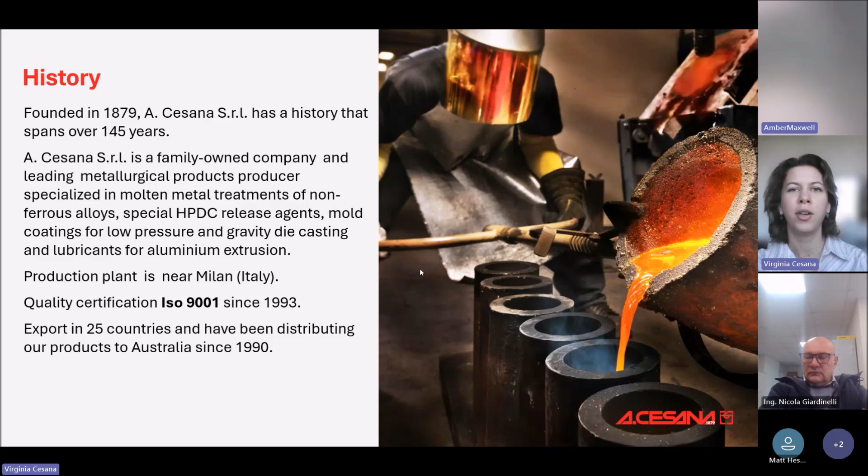So we have extensive knowledge of the industry thanks to these 146 years of existence. And my father has 38 years of experience in the foundry industry. He's seen all sorts of situations and issues, and always tried to resolve them. That's our goal. Our mission as a company is to resolve foundry issues. We usually come in person, we see the problem and we resolve it.

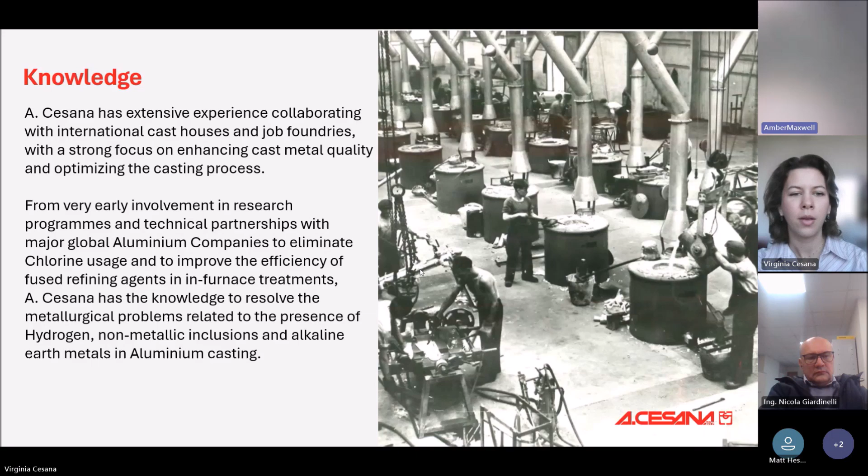And then we have a small engineering department in our company which concentrates on the scientific approach to solve these issues. For this reason, we manufacture machinery and new technologies, which are also automated. Now we have the possibility to connect these machines with remote access to your phone, for example, so that you can always download data or call maintenance or assistance if it's needed.

So yeah, we are very keen on quality, on improving quality and improving processes, making them cost effective and optimizing them. There you go. I was struggling to find the word.

And now I'd like to pass the word to Nicola, who will take you through the presentation of what fluxes are and why they are important. I'll keep on moving the slides. Nicola, if you need to change them, let me know or give me a sign.

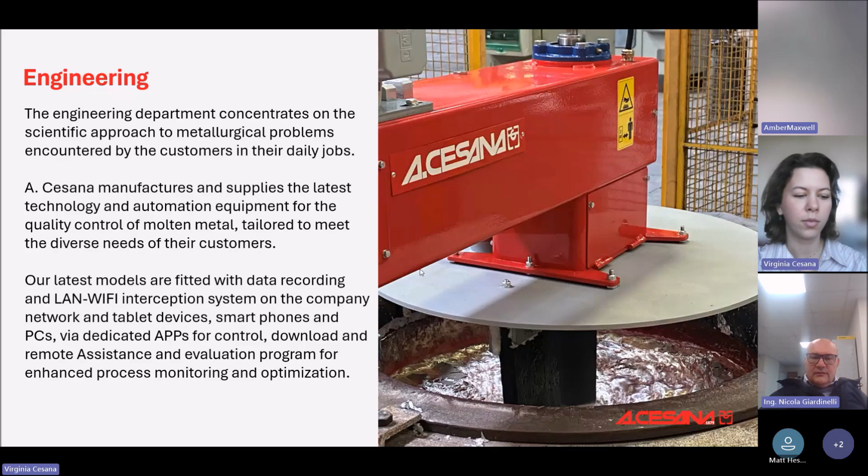Yes, please. So, hello everyone. I am Nicola. I have been with Cesana for 8 years, and I am the commercial manager and technical assistance manager. We work very hard to help the foundries and our customers resolve all problems in the foundry, metallurgical and technical problems, with our products and our knowledge.

So our history is clear, and we produce inside our company all the materials that we supply to customers and distributors. Our focus is flux. And what is flux? Flux is a blend of solid inorganic compounds such as sodium, potassium, chloride, carbonate and fluoride.

The flux is normally used during melting to clean the aluminum and the material. The flux reacts at high temperature to generate an exothermic reaction, able to separate the impurities from the aluminum.

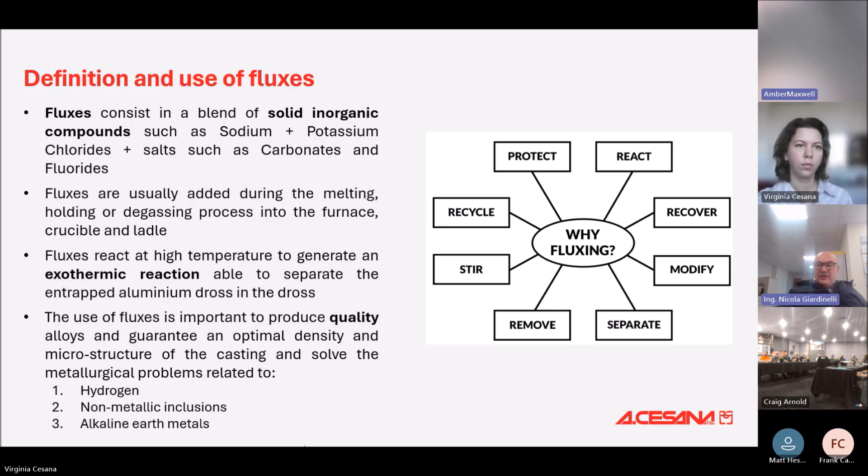Why use flux? It's important to use it to improve the quality of the alloys in terms of hydrogen, non-metallic inclusions and alkaline earth metals. Please, Virginia, change. Okay.

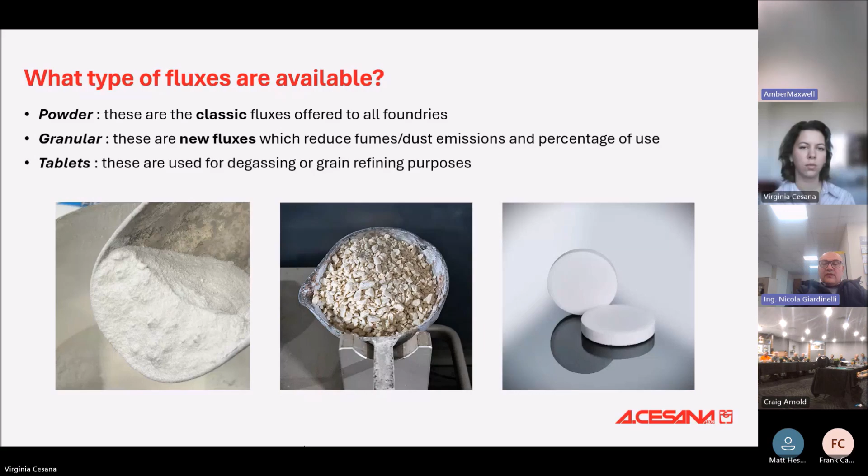Which fluxes are available on the market in the foundry now? Powder. Powder is the classic form of flux; it's very old technology, but still in use in some foundries. The new tendency is granular flux, which was developed to reduce fumes, dust, and emissions. And also tablets, special forms used for degassing or grain refining processes.

So the flux is normally used in powder form. The powder flux is used in high quantity during the process, and for that the powder is not common now, because using granular flux we can save the quantity of the product used during the process.

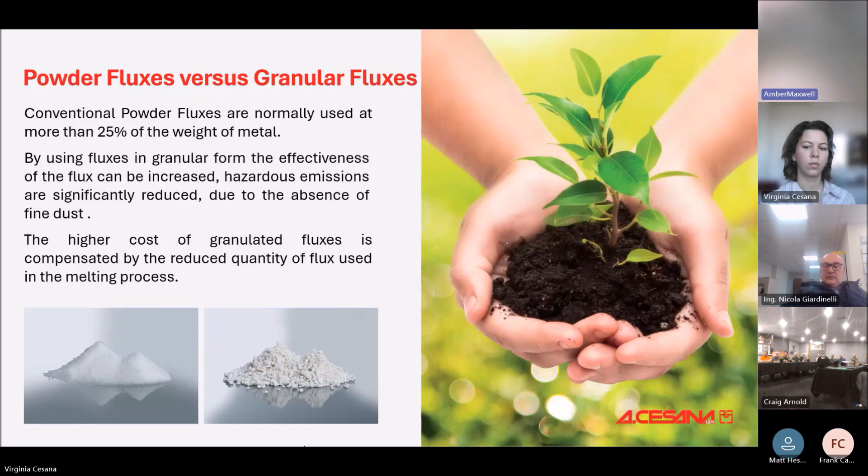So we have different types of flux used for different effects during the process. The first one is covering flux. It's specific to create a physical barrier against the oxidation of the metal in contact with the air. And the second one is to clean. Cleaning flux is used to remove oxide in the aluminum bath.

Drossing flux is used to promote the separation of the aluminum from the dross. Refining flux is used to reduce some alkaline elements like magnesium, calcium, lithium, and sodium. There are different kinds of special flux to clean, used to remove the build-up of oxide on the wall of the furnace, like corundum.

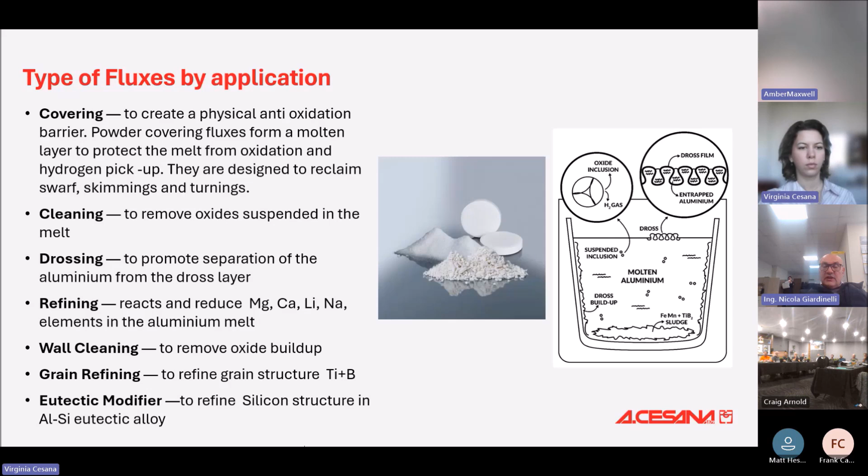Grain refining flux is to refine the structure of the aluminium, such as the titanium boron flux. And the eutectic modifier is used to refine the silicon structure in aluminum-silicon eutectic alloys.

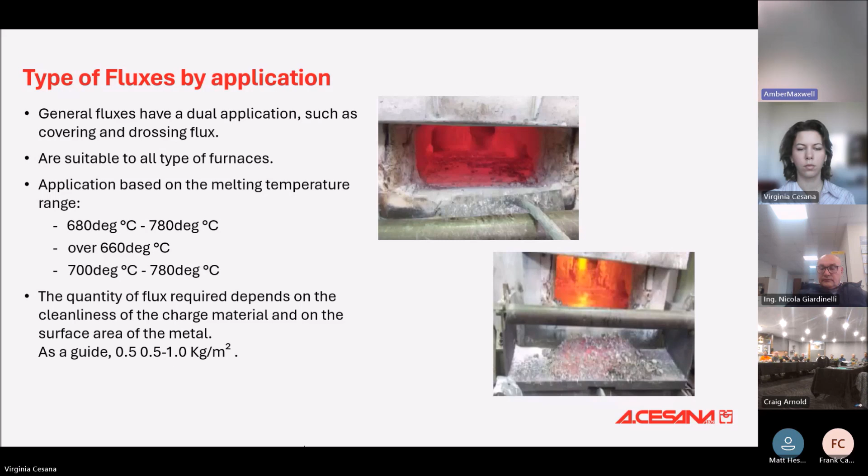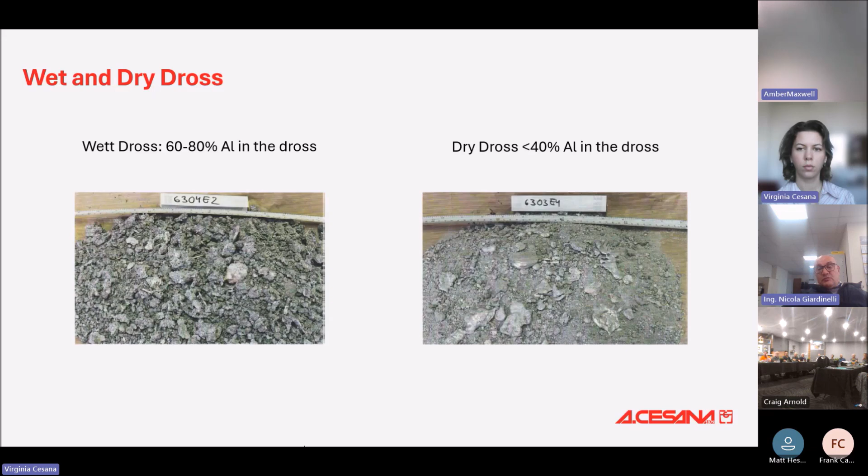In the right picture, we can see the dross after the drossing process with the correct flux. We can see that there is a big difference. In the left, we have a lot of aluminium inside. In the right picture, we don't have aluminium inside, only a small quantity. This means that it's important to use the correct flux. Okay?

Refining flux. So during the melting, we can have inside the liquid metal some impurities, some inclusions, and also alkaline elements. The big problem of the alkaline elements is that they can cause hot cracking during solidification. The second problem is hydrogen. Metal with a high percentage of hydrogen means porosity in the final parts.

The inclusion means non-metallic elements, or could be some parts of refractory material or other parts coming from dirt, and they create inclusion and hotspot problems. And inclusions such as sodium, calcium, strontium, and lithium have the problem that they reduce the fluidity of the metal.

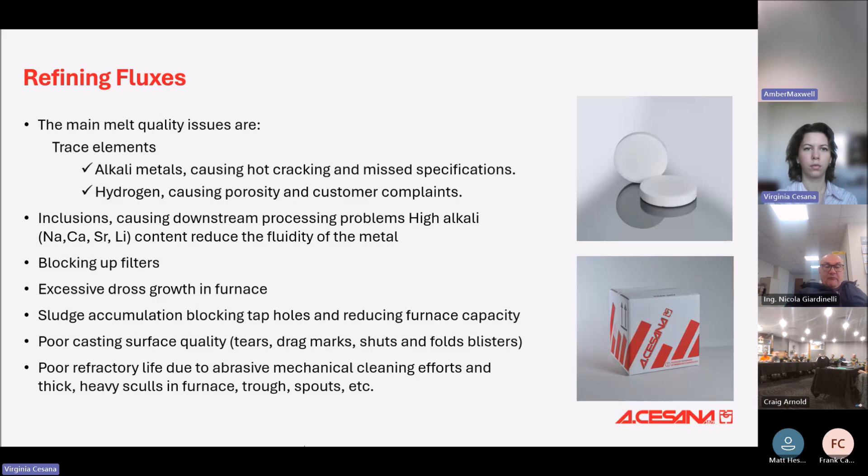So our production is also in equipment for foundry machines. One of them is the degassing machine. It's a specific machine to clean aluminum from inclusions and remove the hydrogen content in the alloy. This machine is fully automatic, and the operator doesn't do anything. The machine provides the whole treatment in automatic mode.

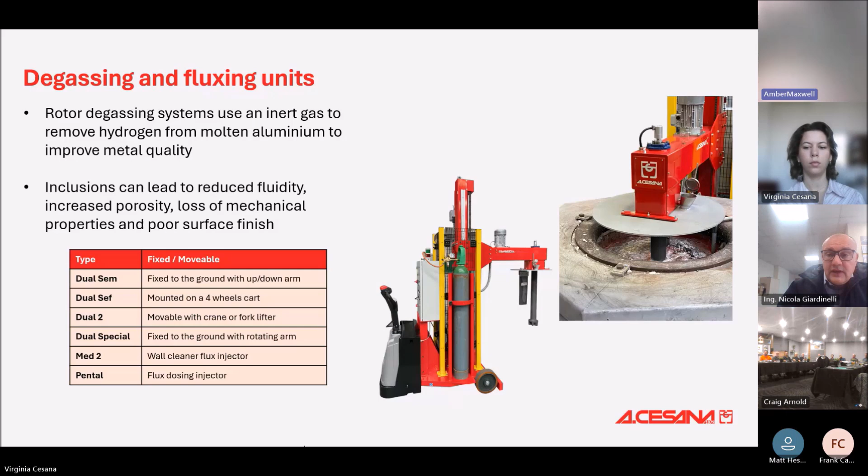Okay, you can. We produce also density units, evaluation units, to make the density test. With this machine, we can prepare the sample under pressure to evaluate the content of hydrogen and inclusions in the aluminum.

So the main problem of hydrogen is the temperature, because the temperature is connected to the hydrogen content in the alloy. When I have higher temperature, I have the effect that hydrogen dissolves quickly in the melt. And with this machine, we can test the presence of hydrogen.

We can evaluate. Normally, it's connected with the degassing process, because with this method we can check and understand what quantity of hydrogen I have in the aluminum and inclusions, and we can adjust the degassing process. With the degassing process, with an appropriate process, we can remove all hydrogen and inclusions. Okay.

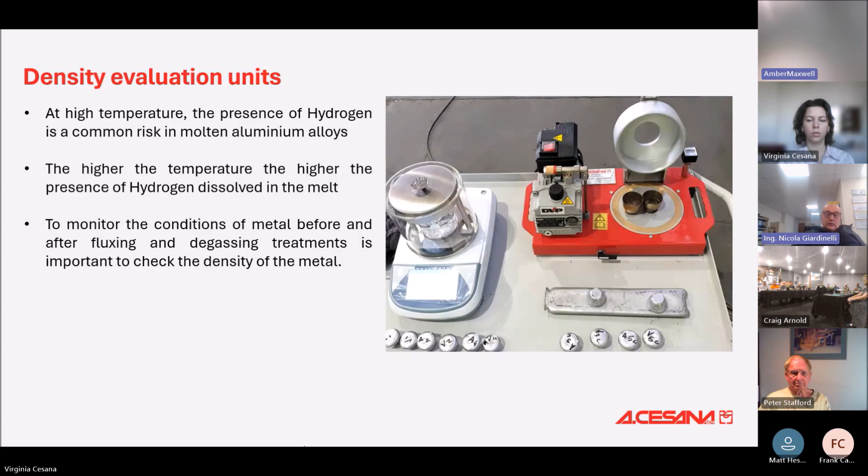Our production includes also release agents for aluminum high pressure die casting, and especially coatings. We produce different types for different applications of these coatings, and specifically insulating coatings, for special use, to isolate the heat in the molds,

conducting and semiconducting coatings, release agents and lubricants for the die, formulated with high-tech emulsions of wax or silicones and oils, and protective coatings, boron nitride, and different elements to protect the ceramic parts and steel tools from the aggression of the aluminum.

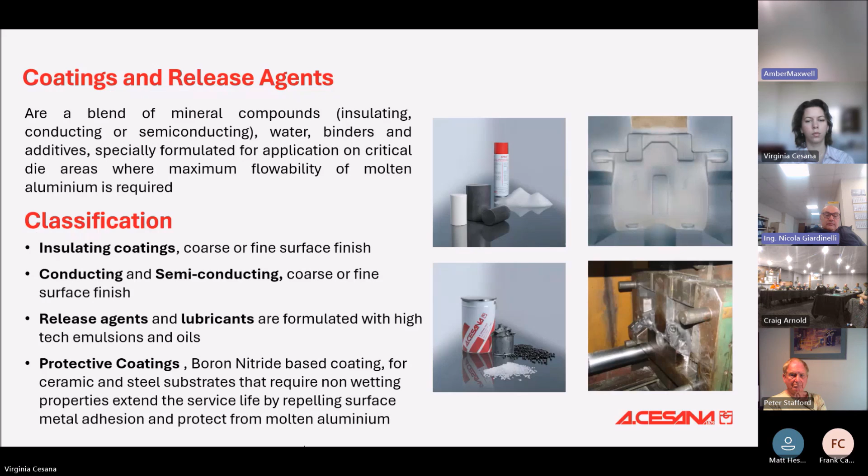Okay, you can change. Okay, we finish. Okay, so thank you. Give back the word to Delia now. Yes, I'm here, coming. Is that all right? Yeah. Thank you, Nicola. Thank you both, Virginia and Nicola.